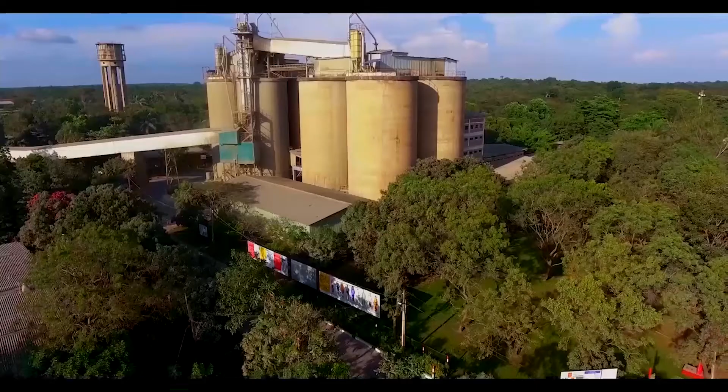INSEE is a proud member of the Siam City Cement Group Public Limited, a leading cement manufacturer in Southeast Asia. The Siam City Cement Group provides world-class construction materials to a host of countries around the world, including Cambodia, Bangladesh, Vietnam, Thailand, Indonesia and Sri Lanka.

With a plethora of landmarks and buildings that define the skylines of these countries, the Siam City Cement Group pledges to be a role model in corporate governance and sustainable development.

INSEE Cement, Sri Lanka's premier cement manufacturer, is the brand behind our country's leading cement products and the driving force behind making Sri Lanka more sustainable.

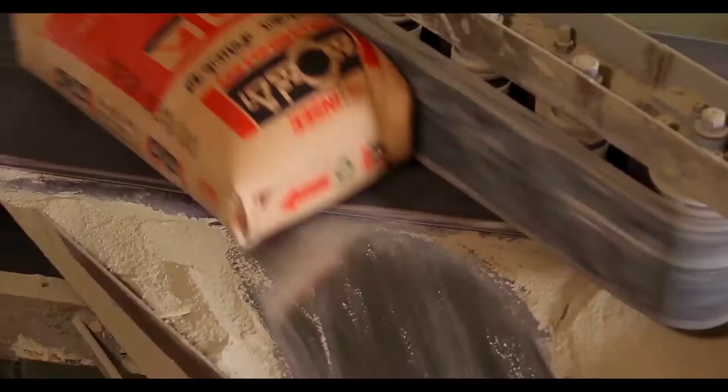With a reputation built on outstanding performance in the quality of our products, unparalleled customer service, the dedication of our employees, our respect for the communities in which we operate, and our ambition to set the standards for the industry of tomorrow, we have contributed to the growth of Sri Lanka with iconic developments across the island.

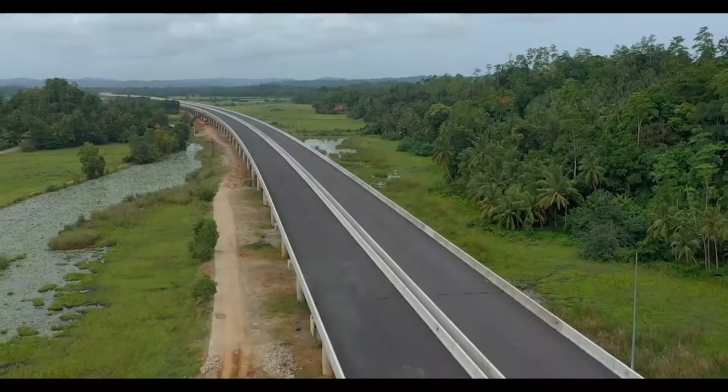Just to name a few: the Lotus Tower, Altair Residencies, the Colombo South Harbour, Southern Expressway, Mattala Airport, the Kalladi Bridge, the Kotelawala Defence University, Mahinda Rajapaksa International Cricket Stadium.

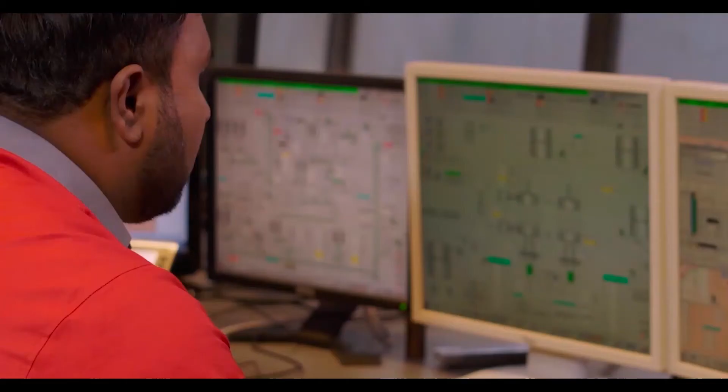INSEE has cemented its position as the most preferred local manufacturer of cement in Sri Lanka, with its widespread distribution network comprised of over 7,000 dealers in retail segment located island-wide. Today, we have 2 plants in Puttalam and Galle and 2 terminals in Galle and Colombo.

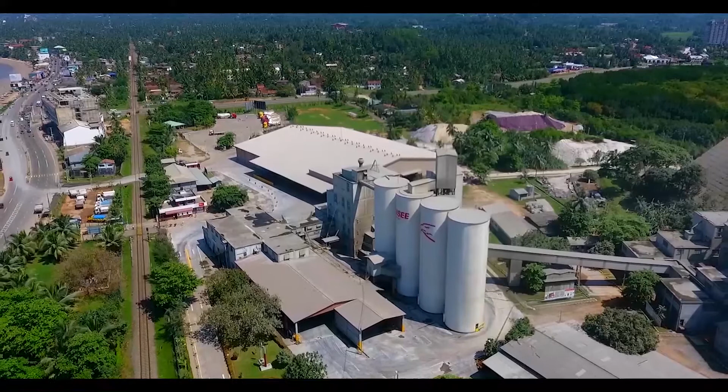INSEE's Sunstar brand is Sri Lanka's first cement product to be awarded the Green Labelling certification by the Green Building Council, and was the first blended cement to launch in Sri Lanka.

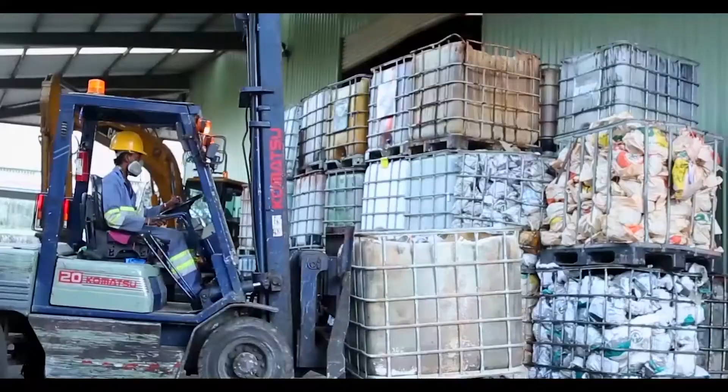INSEE has a wide portfolio of cements and services to suit all your construction needs. The most popular among them: INSEE Sunstar, INSEE Mahaweli Marine Plus, INSEE Extra for mass pouring concrete, INSEE Rapid Flow Plus, INSEE EcoCycle, INSEE Concrete, Conwood by INSEE, and our state-of-the-art innovation and development facility.

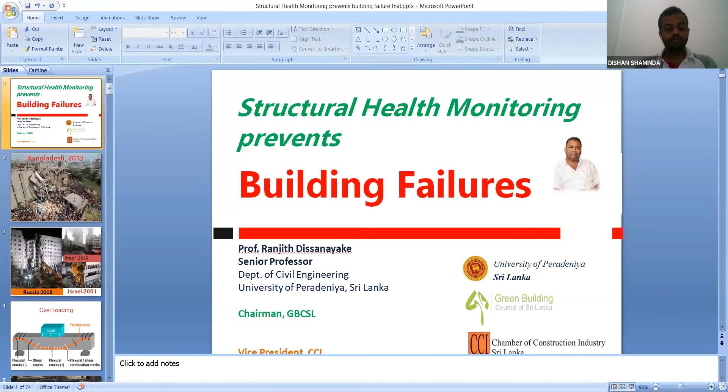Sir, over to you to do the presentation. Professor Ranjith Dissanayake. Thank you. Hope you can hear me, right? Yes, yes, it is clear and we can see and we can hear.

Okay, thank you. The title that I have been selected today is Structural Health Monitoring Prevents Building Failure. Before starting the topic, I would like to give my thanks to the IESL team for inviting me to do this presentation, and everybody believes that it's a timely important topic as there are several failures in this country.

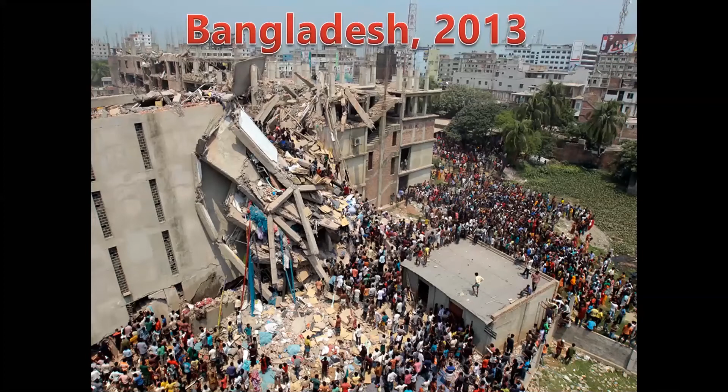Let me start with this slide. This is a failure in Bangladesh 2013. When you go to the detail of this one, this was a Dhaka garment factory which collapsed due to structural failure. Number of deaths within the building collapse itself, 1,134. Injuries more than 2,500. That is a kind of eye-opener in the world why we have to be keen on safety of the building.

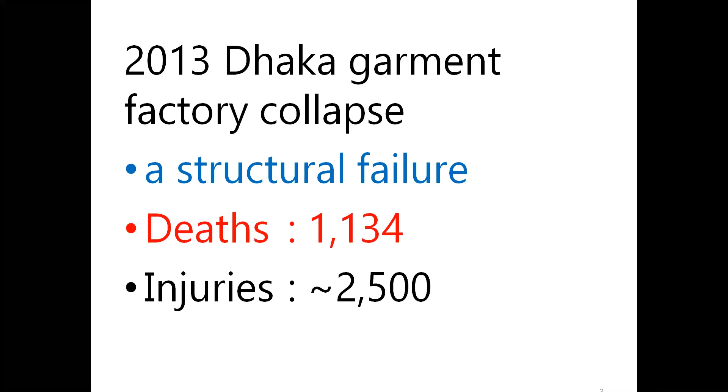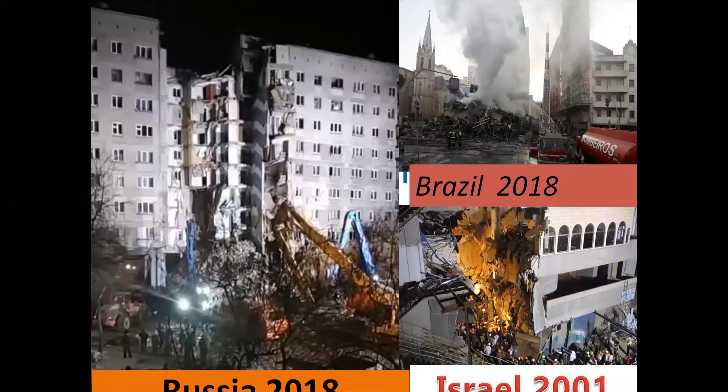With that, I start that when you go around the world, you will see there are so many failures upon building, bridges, and so forth. When you especially go to the building collapse in Dhaka, it is due to the overloading because of the booming of the industry, economy. People get more and more orders, so they keep on increasing the number of floors, the number of employees, and so forth. They never think about the safety of the structure.

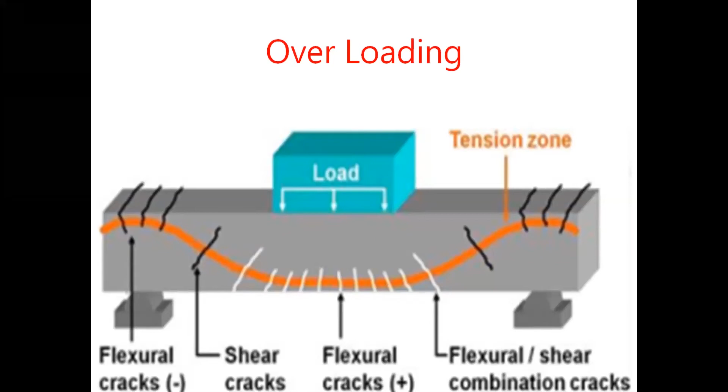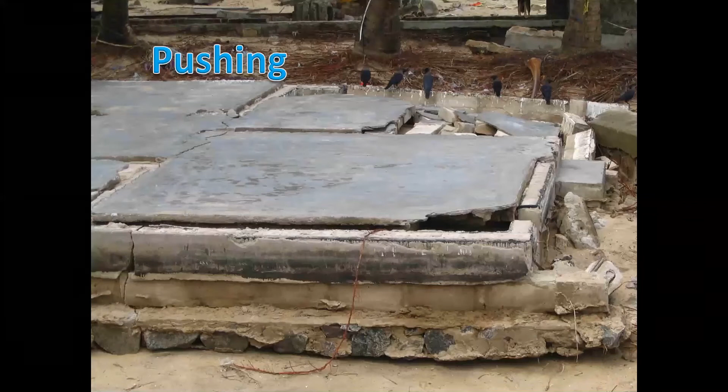Eventually, the building will collapse. And there are other ways of failing the structures. Sometimes you have the lateral push load, as you see there—the whole building will go sometime. This is something that happened during the tsunami in 2004. Again, sometimes you get failure due to the shaking. Fortunately, we don't have much shaking in this country, but countries like Japan, US, part of the US, due to earthquakes and so forth, get the shaking and building collapse. Sometimes due to the wind, cyclone, lifting of the structure will take place.

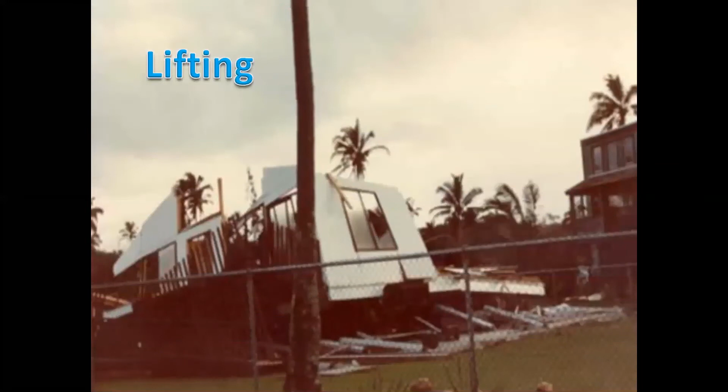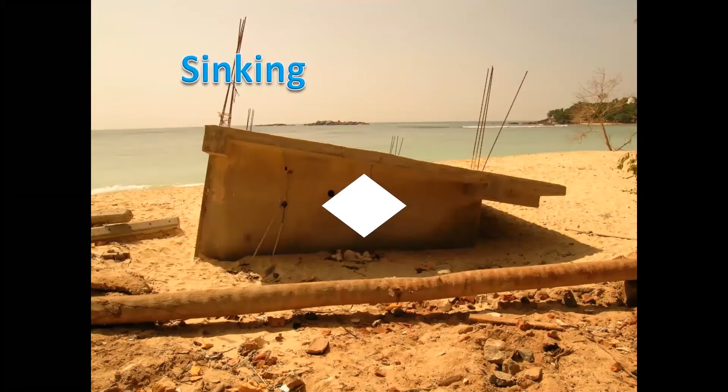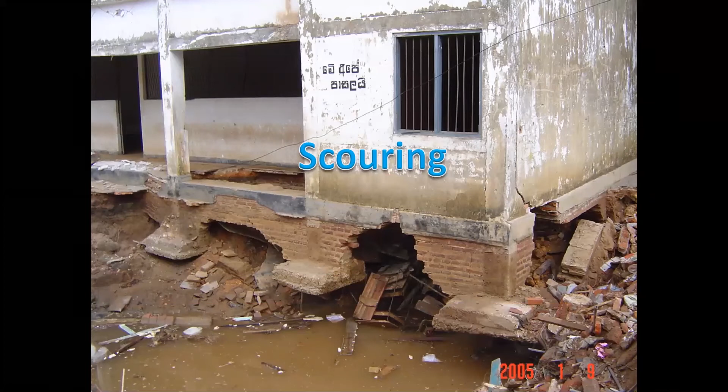So sometimes the full structure will be taken away, sometimes the roof will be taken away - there are situations we have seen. Then again, there will be some sinking that can happen due to the earthquake, or due to some movement of water under the foundation. Sometimes we get the scouring, as you see there, the foundation fails. Depending on the height, eccentricity and all that, the building may fall down. Sometimes you don't see the undermining under the foundation until the building collapses - you never see it. So these are some of the ways a building can collapse, starting from overloading to pushing, scouring, shaking and lifting, and so forth.

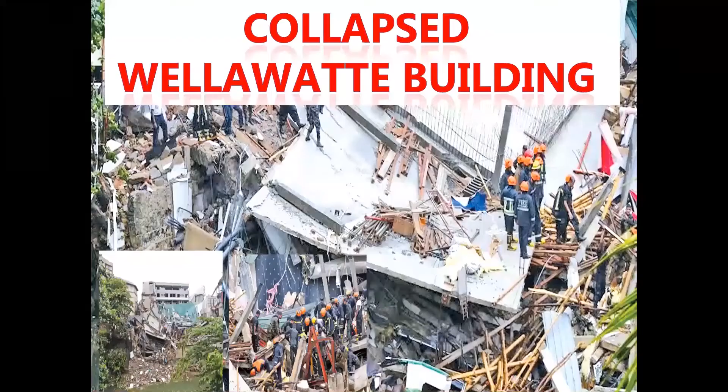So let me come to the Sri Lankan context. There are several failures, but these are some of the highlighted ones - the Wellawatte building collapse. There has been investigation and so forth, but I'm not going into detail. I would just like to see what happened there. Again, sometimes the situation is a combination of failures.

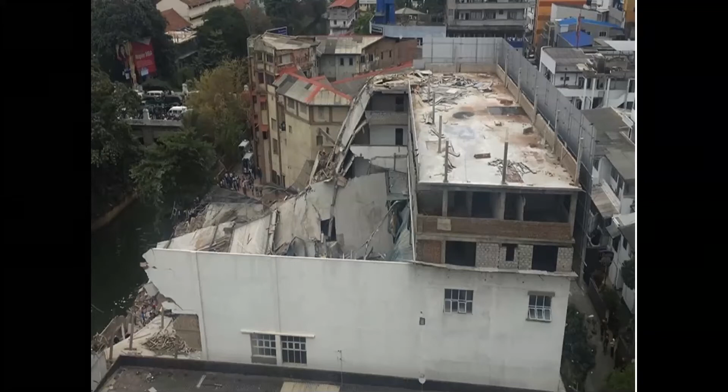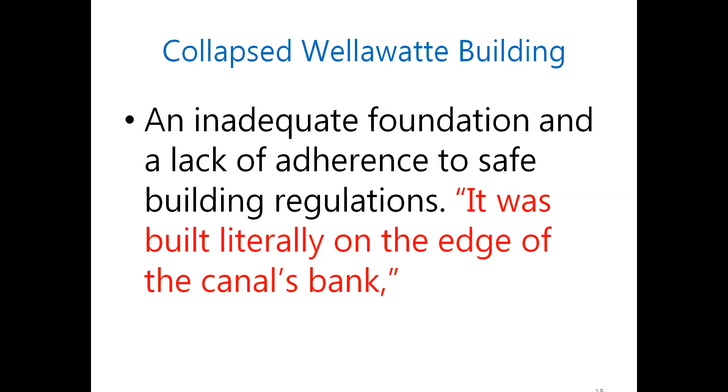Then the very recent failure in Sri Lanka is the building collapse in Kandy, 2020. So again, all the communities and authorities are looking for a solution, trying to find out the procedures and so forth. But as usual, after a few months' time, as happened with Wellawatte, the interest fades. That is what's happening. Otherwise, if one failure happens, we should establish all the - but we, being professionals, should have been discussing this matter: structural health monitoring, failure, forensic engineering. During the last several years we have been discussing this.

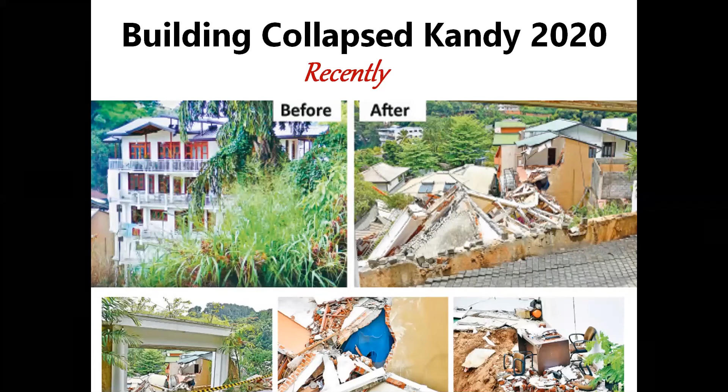Let me see how this building came about. This is the photograph before the failure, and this is after the failure. Again, we have noticed this is in a hilly area where there is water movement. I believe the foundation was also unstable - maybe scouring had taken place, but nobody could see that, right?

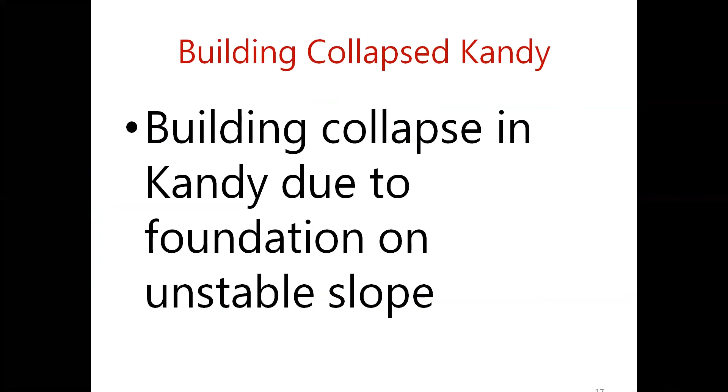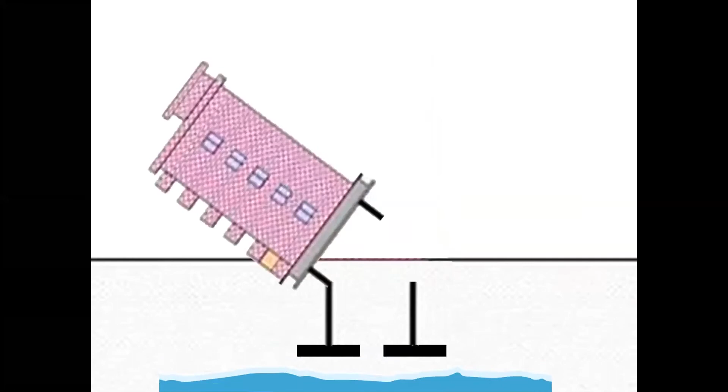So basically it can be something like this: maybe the foundation - there can be water movement under the foundation, and then the strength of the foundation will be lost. Then eventually it might fail, as you see there. That's what I remember. So this is the result of it.

So now we are concentrating on the failures in Sri Lanka. When we discuss these two incidents, I see these two in a way as kind of natural disasters - of course partly man-made, but we say it's a kind of natural disaster because we don't know until it fails, since it was fine for a while until it failed. So that kind of natural disaster, the way it is, we don't know, right? So we'll assume it's a natural disaster. Anyway, we didn't see the undermining, we didn't see the various things, and it went down.

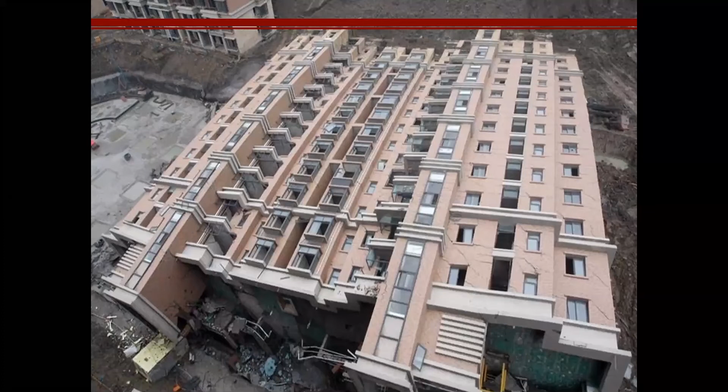But when you look at this failure in Shanghai, China, I see this as purely a man-made disaster. The man-made disaster will explain how these two natural disasters happened in Sri Lanka - the Wellawatte one and the Kandy one. So this apartment complex fell down, as you see there. They had constructed maybe 13 similar towers, so why did only one tower collapse? That's what I mean by man-made disaster. This is how it happened.

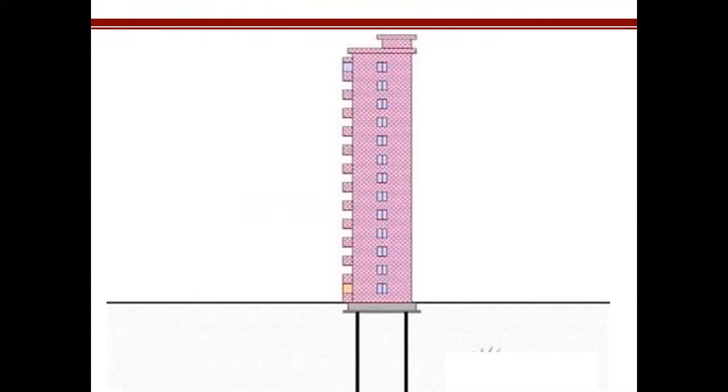This is how they completed the structure. But why was it a man-made one? They wanted to construct a car park once it was completed, only in front of this apartment complex, not other places. So they cut into the ground, as you see there, and not only that - they made another common mistake: they took the soil and put it on the other side, and that soil was also pushing against the foundation and the nearby area.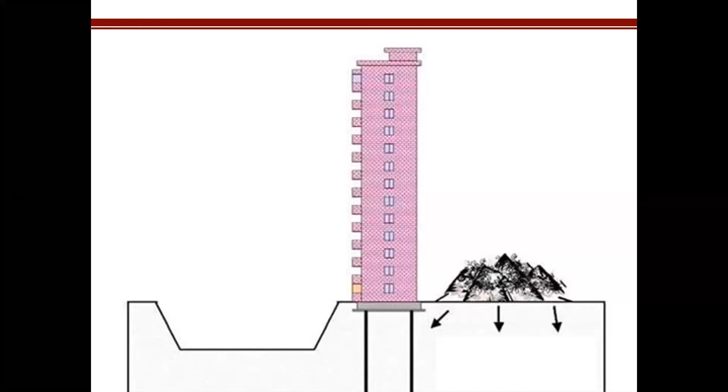Then, in addition to this, the rain came the same day, the following day. Then this is like what happened either in Vellavatta or Kandy, which took a period of time to reduce the strength of the foundation. But in the case of China, the Shanghai situation, it came within a few days' time. So that cut is a man-made cut. Therefore, I believe it's like a man-made disaster.

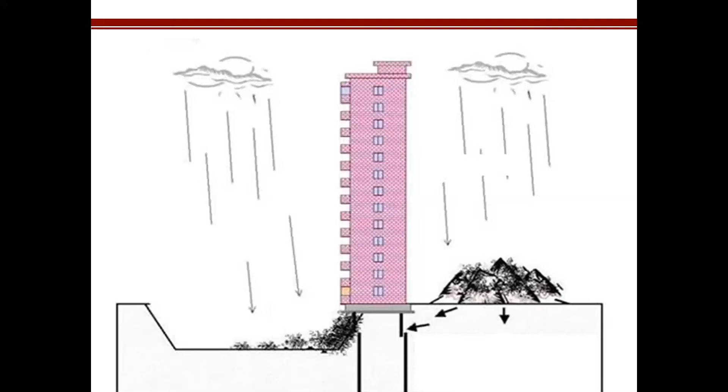The photographs are different, but my belief is that both the Vellavatta and Kandy cases have a similar situation. But of course, the increase in number of floors, design failures, and the accumulation of sand and rain, overloading are all contributing factors.

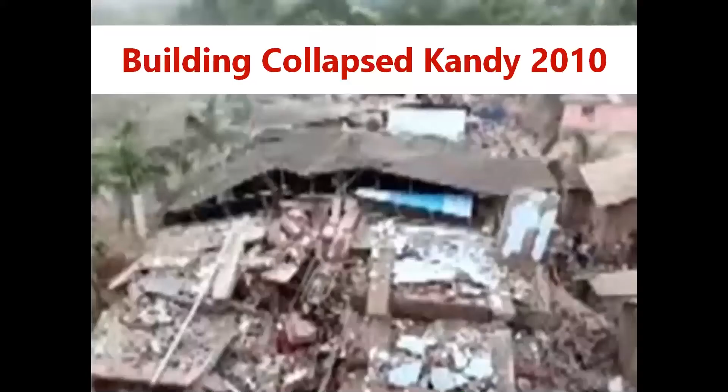Basically, this has happened. I remember there were a few other failures in Kandy itself. There was another failure 10 years before. We have to at least make sure there won't be a similar failure by 2030 - there was one around 2010, and 2020 as well.

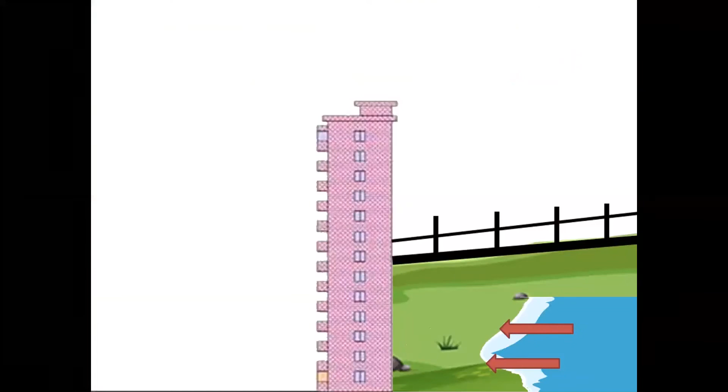Now let's see the Kandy failure. This happened differently than what happened in the Vellavatta case.

There was a retaining wall supporting the soil, and the retaining wall pushed toward the building. The retaining wall was actually connected to the building itself. Due to the forward pressure, the building was pushed.

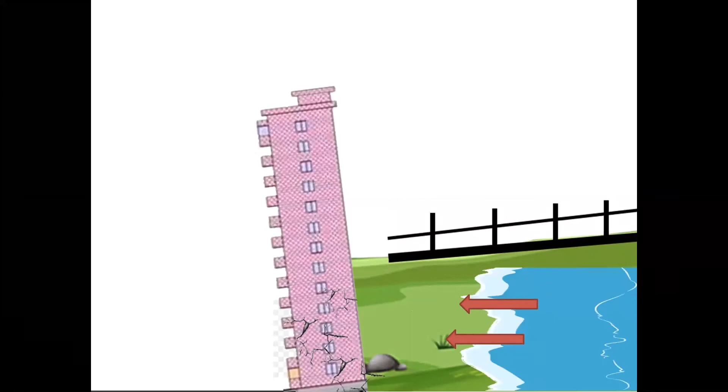Then what happened - there were a few cracks and all that, and eventually the building came down. You will see this in the photograph.

Even if you look at the photograph before the collapse, you'll see that the electrical post has inclined, and you'll see some cracks on the pole in front of the building. That clearly shows the building was pushed by the retaining wall - how it was pushed, and how the load came due to water pressure onto the building.

Anyway, finally - anyway, my topic is this one. Now I was talking about the Bangladesh failure at the beginning and the number of deaths.

That was purely due to overloading. Why was it overloaded? Because of the demand they received. It's a garment factory - they kept increasing the number of floors and machines and so forth. They never thought about the structural health.

Again, we found that some of the recent failures - the 2007 failure and the Vellavatta failure - all have this recent failure pattern that was explained in the photograph.

My topic is not about the building failures themselves. That is what we see, that is what we experience, that is what we don't want. Then, as a professional engineer, what is the solution that we can give? That is the important part, so that is what I'm going to describe.

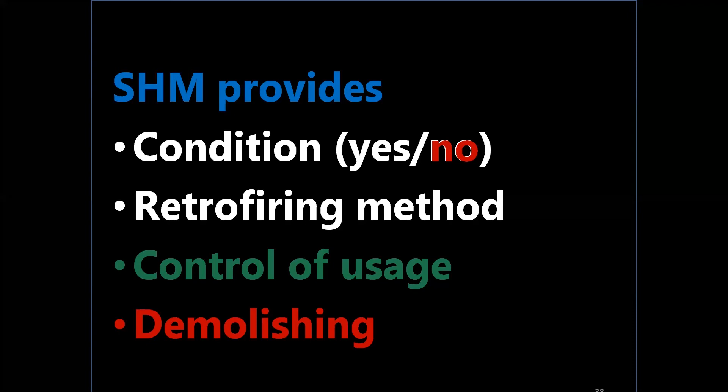Otherwise, you can say you have to demolish the building and go for a new one if it is your requirement, if you want the same functionality in the same place. If the situation is very bad, you can't increase the floors or anything - you demolish it. That is the last option. But we never want to go to demolition of structures - we will have some sort of solution. Demolition is always the last option.

There are other failures, but I'm always interested in bridges. That is one of my key areas where I entered the field of structural engineering, as well as structural health monitoring. I was involved in a big project in New York once - they have been trying to strengthen all the bridges around Manhattan Island. I know how much effort they took, but still these bridges are doing well.

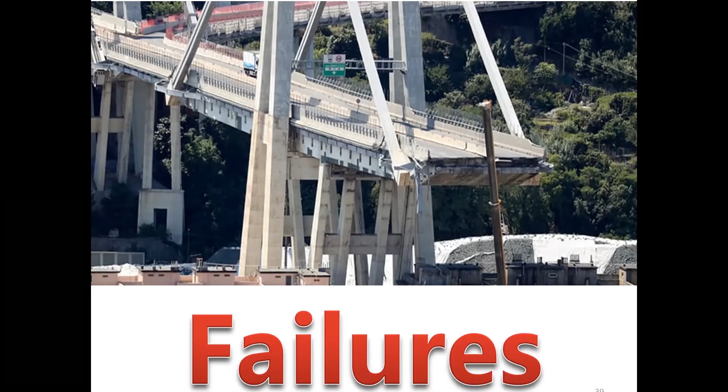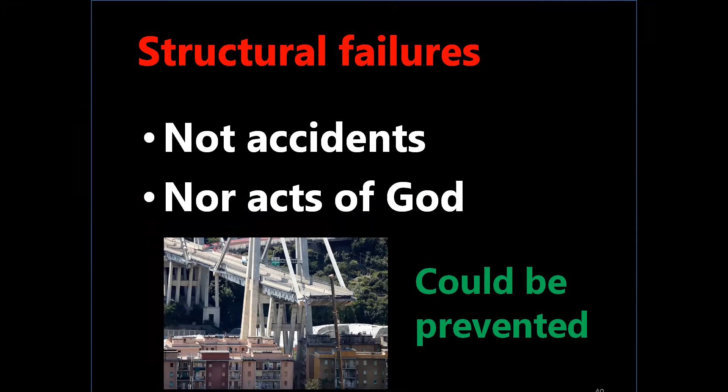We had a very thorough structural health monitoring program. As I know all the details of how Columbia University especially attended this structural health program, when I see this failure, I can say this is not an accident - this is not an act of God. This is a failure, but I felt this incident could have been prevented. Actually this bridge - that was 2018, as I remember, in Italy. My understanding is this bridge's failure could have been prevented. That is how strong structural health monitoring is - I can say with much confidence this could have been prevented.

Then there are other reasons to fail - human errors, carelessness of design, ignorance and greediness. Greediness is a very good example of what happened in Bangladesh - they were so greedy to produce, and this may be the reason. Ignorance and various other things - I'm not going into detail, but these are some of the reasons.

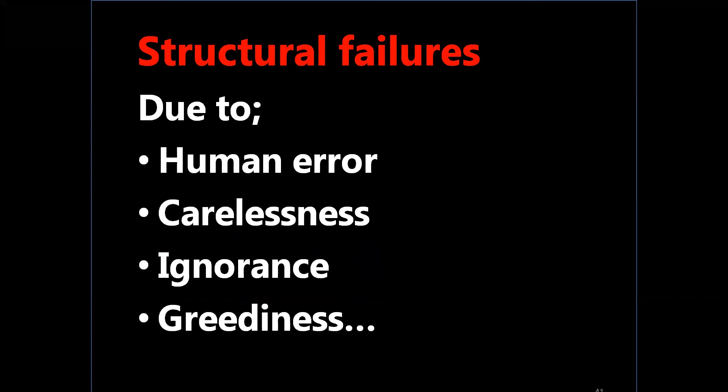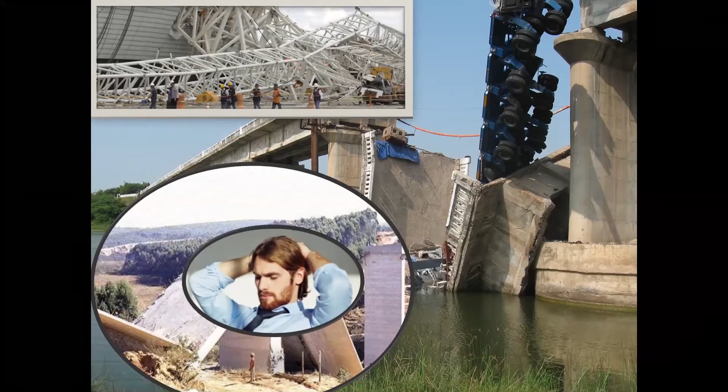So when a structure fails like this, that's when we start figuring out what to do. It can be a bridge, it can be a truss, it can be anything - everything can come down without any type. Then the problem is there's a party who really worries about it - they worry why it came down, what happened to the structure, how it came down, and who is responsible for this kind of failure.

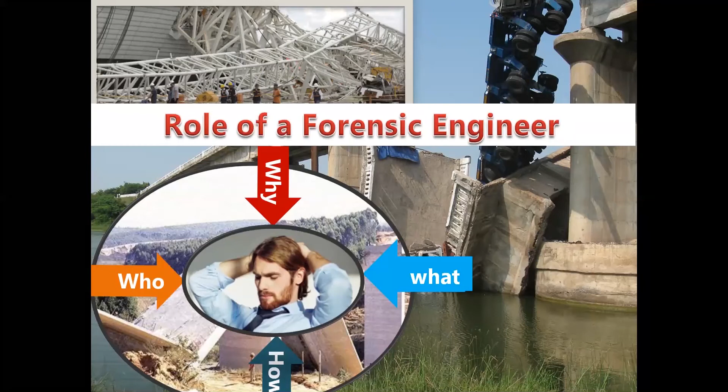Then there's a person called forensic engineer who comes to the scene and analyzes it, and says why it came down, what happened, how it came down, who's responsible, whether it's a problem with the architect, consultant, contractor, the client, or another party. Sometimes there's a political reason for failure—some failures happen due to political instruction, where the poor engineer has taken care of things but the structure still comes down. So the forensic engineer can give the solution, but that is too late, right?

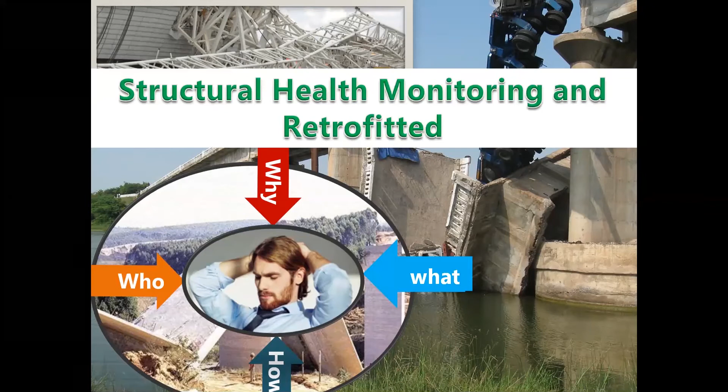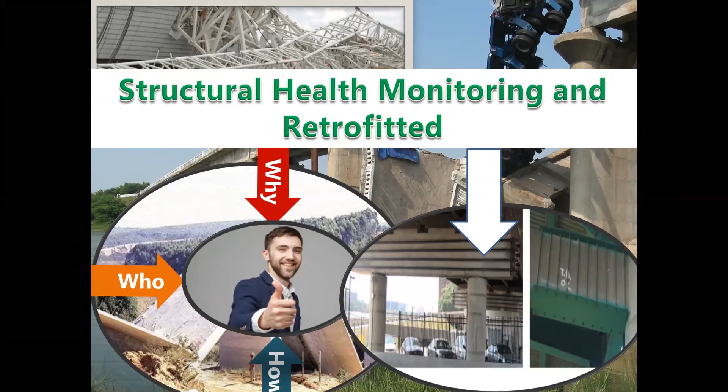So today's topic is: structural health monitoring can prevent structural failure. This is the last option—by then it won't give you anything back. But the owner or client will at least understand why and how it came down, though claiming and getting the money back is not an easy task. What he should have done is gone for structural health monitoring and retrofitted issues early. Then the client will always be happy to see the structure working. This is what we want as engineers—to see structures monitored for their health, and retrofitted to the satisfaction of the code, so the client doesn't have to worry.

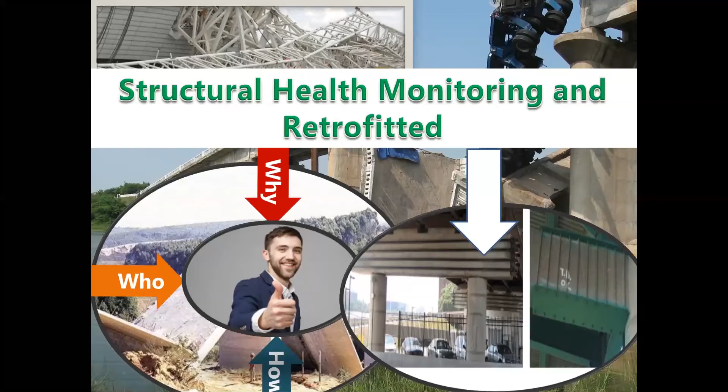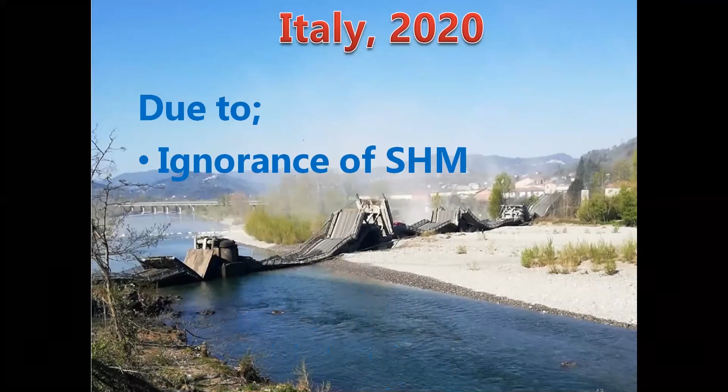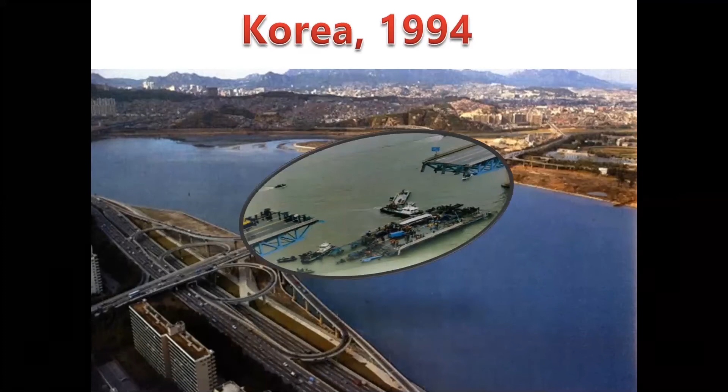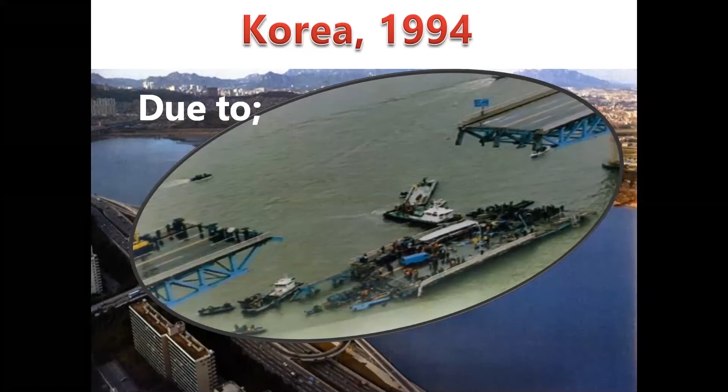So many structures failed during the same period—a supermarket also collapsed in Korea due to overloading, because people were buying more goods and the store needed bigger capacity. They had a 4-story supermarket and extended it to 5, then 6 stories. Then one day the whole structure collapsed. These things can be prevented if they had gone for structural health monitoring.

Now I'd like to explain structural health monitoring using a bridge example. As I told you before, I'm more focused on bridges than buildings. This is one of the first works we did as soon as I finished my PhD under the supervision of Professor Ranjith. I'd like to explain how we did it, briefly.

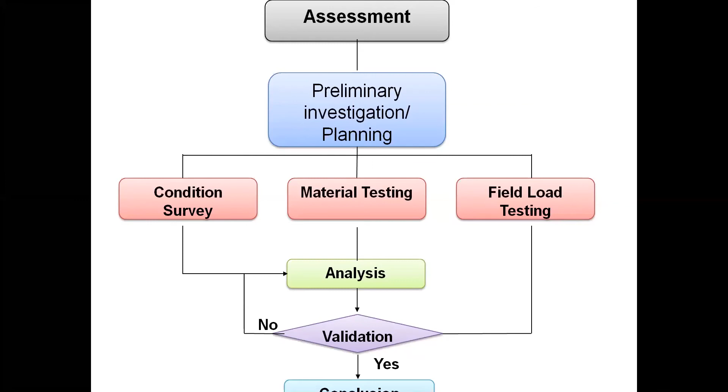So this is the procedure for structural health monitoring. Assessment was done, preliminary investigation was planned, and we did the condition survey, material testing, and field testing. The condition survey was done in order to do the analysis. Material testing was done to get the present strength of the material, so we could go for proper analysis. Then we did field load testing and validated it. Once we have a validated model, the rest is much easier. Let me tell you the procedure.

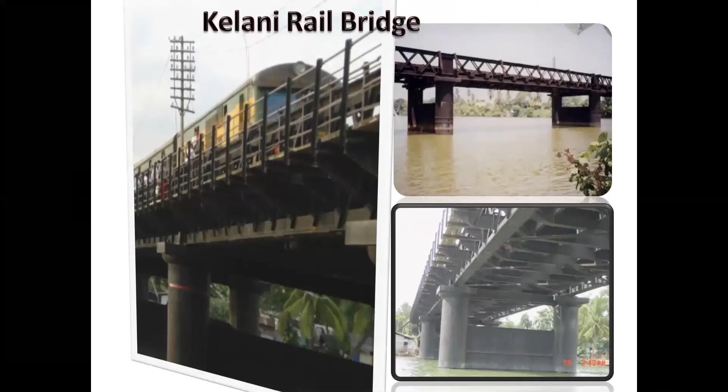This is the Kelani Railway Bridge, which people sometimes call the Black Bridge. You may see it when traveling from Colombo to Kandy, on the right side. What we were asked—this bridge was, as I remember, 107 years old when we did the analysis—they merely wanted to see its condition. So this was the condition survey: we physically went through every element of the structure to understand its condition. We even used boat service to go close to the piers and all that. All conditions were well recorded. This is very important—it took time, but we did it.

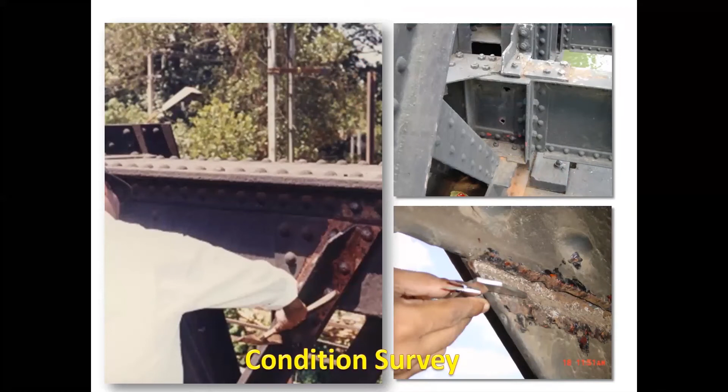Then we did the testing of the material. We brought out samples—but before taking out a sample, we have to find the best location for it. These steps are very important. Finally we get the sample and do all the testing—compression testing, since we don't really know what the real material strength is without it.

And we went to the practical load testing and so forth, because now we want to understand the present material that is not available anywhere in the world. That is unique for the material that is there, because it has been subject to wind, heat, raining and everything. We need to know the present situation of the material.

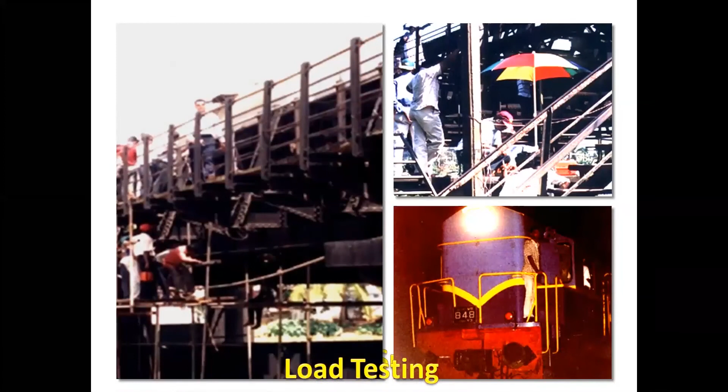And that was done. Then after that, we did a load testing. Load testing is the critical one, because we have to eventually stop the traveling and the movement on the bridge, maybe from 9 o'clock to the next day morning. Then we had to bring...

that is the M8 engine, as I remember, the heaviest engine that we had in the railway. So we brought it, and we changed the speed, like 5, 10, 20, 30, 40, increasing and suddenly braking on the bridge and doing various things.

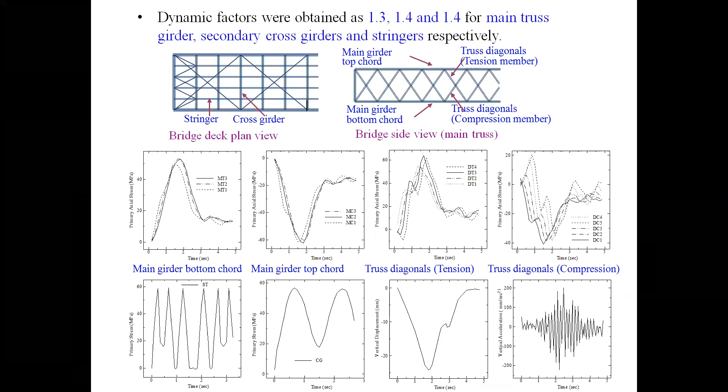So then this is very important, the finite element model, which is well validated. One side you see the analysis data, the other side you will see the data that we obtain from the loading. So you will see that these values are getting closer.

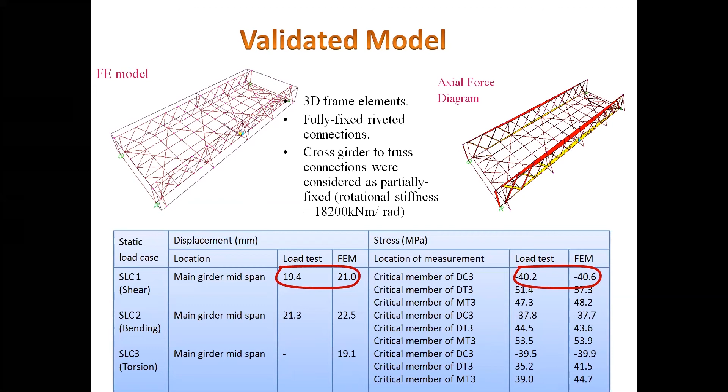It's not that easy to get them close. We have to do various things, and it's easy to see that they get closer here, but it's not that easy to get that close as you see there. But anyway, we had to manage it, and we had to do the validation so that we now know there is a model that is a validated model.

That means once you have the validated finite element model, now you can do the strengthening, increase the life, and many things like that. This is the validated finite element model for the bridge, so that we can use it. So that is the big theory part of it.

That is why I have confidence when the failure of this Italy bridge happened, I said that this could have been prevented. I'm confident that I can say we would have done it, right? But I don't mean myself, but the world has the technology, they have just not implemented it.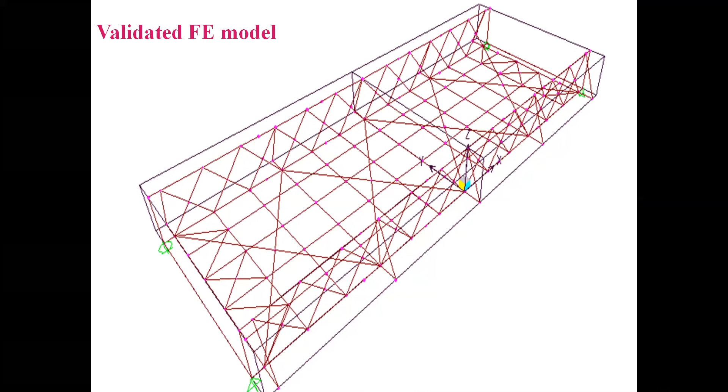So finally, we will go into the detail, and these are the theories we used. This is important because the structure can collapse due to fatigue load. The fatigue life of the different members was calculated. Some members had 20 years, and 24.

That means we understand the most critical members for the structure are the cross girders and stringers. If we enhance their life, we would extend the life of the structure. So sometimes a bridge will collapse due to a small element failure. But if you increase the life of that particular member type, you can increase the overall life further. That is exactly what we did.

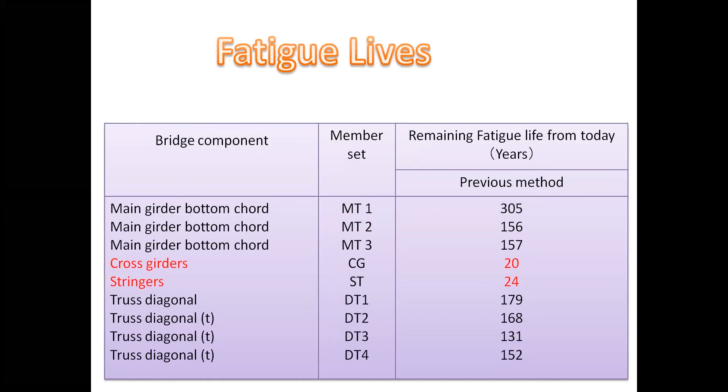So the structure is still in use. So that's what we mean when we say the failure could be prevented.

As I said at the beginning, I have been talking much about building failures, and I think many people attending today would like to know more about buildings rather than bridges. So I would like to come up with a partly failed building.

So this I have presented to you before. Some of you might have seen it, but anyway, listen to it. We did forensic engineering because when we heard there was a crack, we went for structural health monitoring.

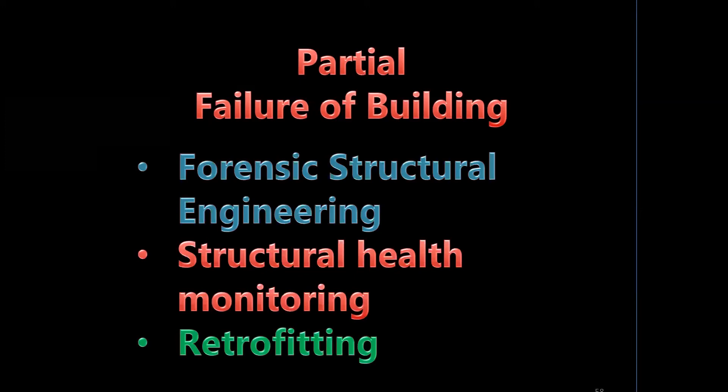Finally, we ended up with retrofitting. So this is the building. It is partly a factory, partly under construction. But what I was informed is that there are a few cracks.

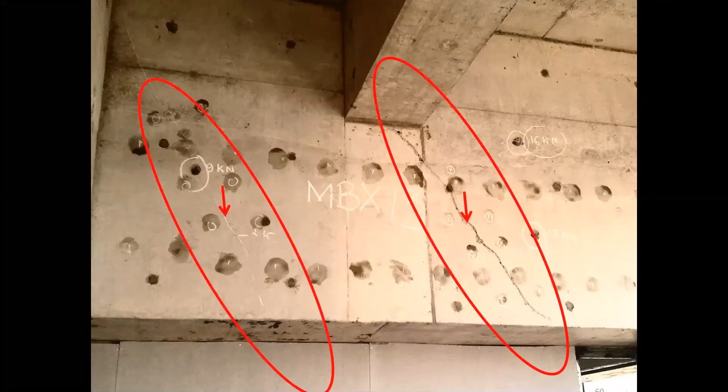Why don't you come and have a look? So this is a close view of the structure. So I went there, and I found there are a few cracks as you see there. These are shear and bending cracks on the major beam.

But keep in mind, this is just for the self-weight. This is not due to loading. This is not being used yet.

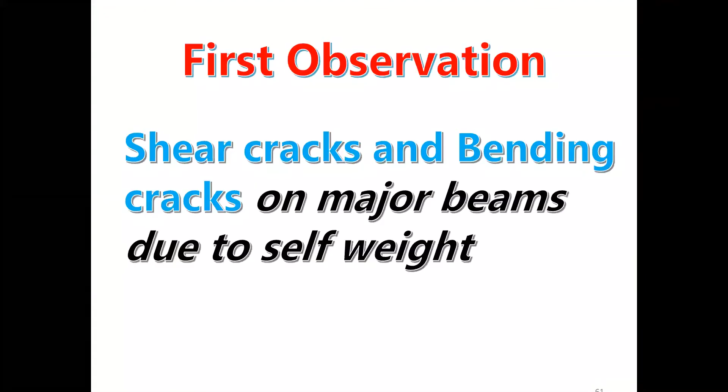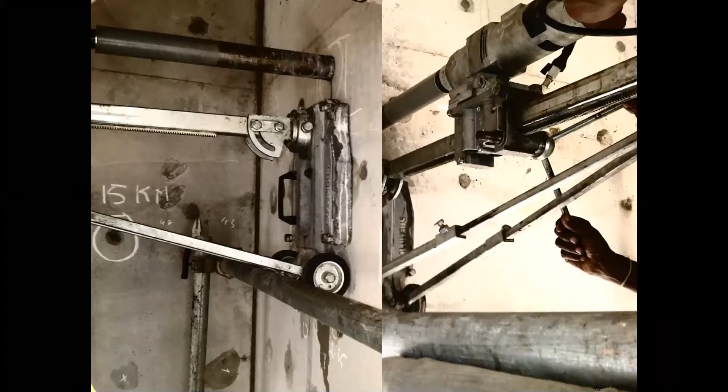So we understood that we started partly with retrofitting from the forensic work, partly with structural health monitoring. And we got samples where possible and did concrete testing and various things.

But in the meantime, we did the finite element analysis, and we realized there are a few reasons, but the main and critical reason is a design failure. The design is not adequate, and the reinforcement has not been done properly.

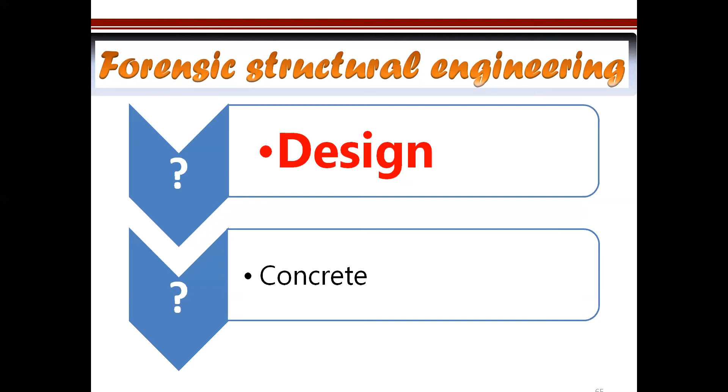The problem is the design failure, right? Once we informed the designer from India, they said that they want us to do the retrofitting design, strengthening design, how to improve this. We said, rather than we do it, you do it yourself. We will do the reviewed part. So they did the design.

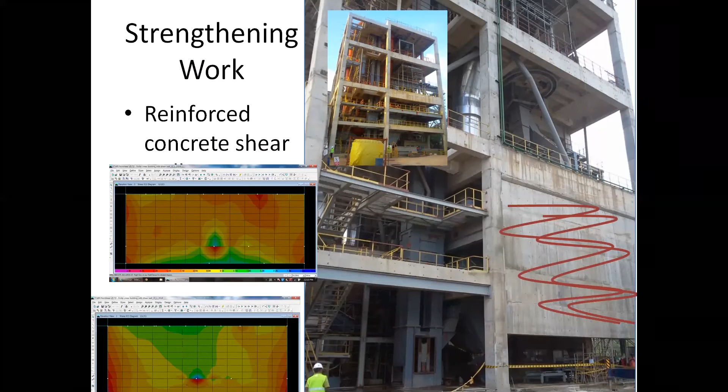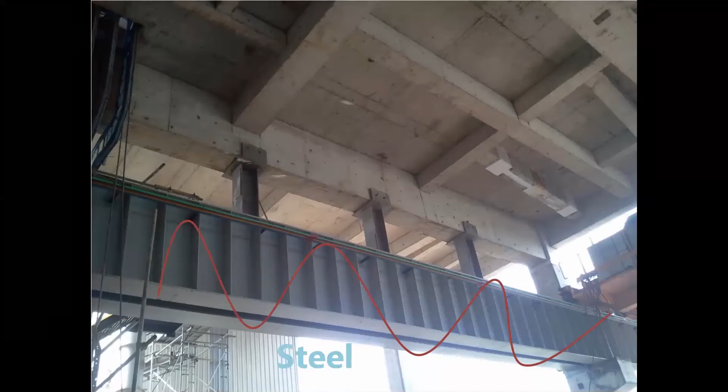Also, in some of the photographs you will see steel and fiber reinforcement core was used for strengthening. Why? Because this is addition - they don't want to disturb the structure operationally. Keeping the operation in good situation, they do the strengthening. This is also not there at the beginning. They added the steel and the fiber.

Now what we are doing is structural health monitoring or forensic engineering. We realize the structure is not adequately designed - design failure. So what we are trying to do is improve the weak element of the structure, so that finally the structure can be used. So this is what you see.

Now structure, as I remember, this was done about 6-7 years ago. The structure has been in use during the last 7-8 years without any trouble. When we recently went, about a year before, we did another check. Now the structure is in good condition.

So I'm getting to my conclusion of the study. Let me see the time. Conclusion of the structure: any alteration must be reanalyzed.

This is to say that if you want to increase the number of floors, if you want to remove the flooring and just render and go for tiling, if you want any alteration - any removal of the wall or addition or anything - any alteration must be reanalyzed. You have to reanalyze every time.

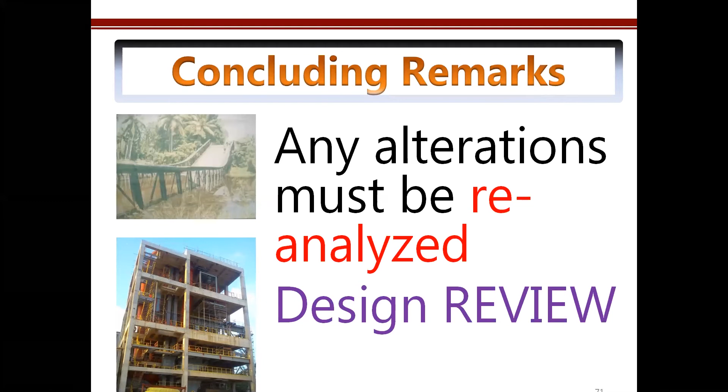Then design review - that is exactly what happened in the case study I presented on design. If they go for design review, they would realize there is a problem in the design, and they would have prevented it. Therefore, when you do a design, no matter how much you try to find errors, you will never be able to find them all. It's therefore very, very important that third-party review happens. Even otherwise, for a small design, even a peer review may be accepted.

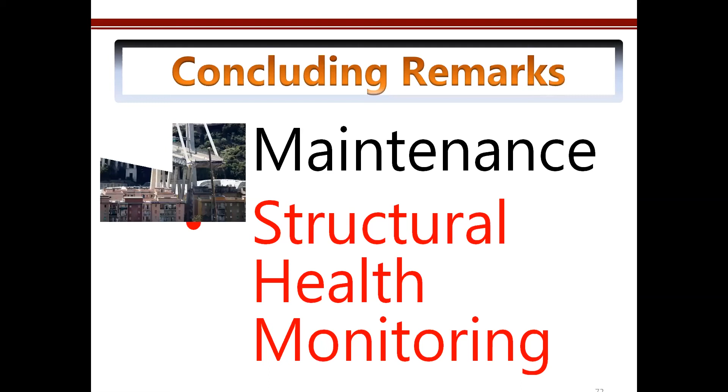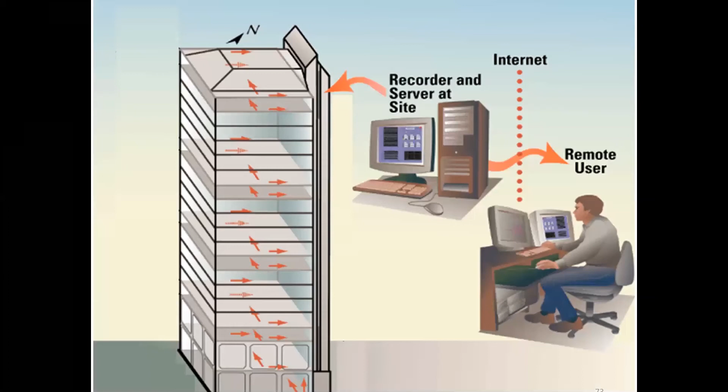So this failure of the Italy bridge I was talking about, especially the maintenance topic, is today relevant: structural health monitoring can prevent such failures. With that, I will be concluding my presentation so we have enough time for discussion.